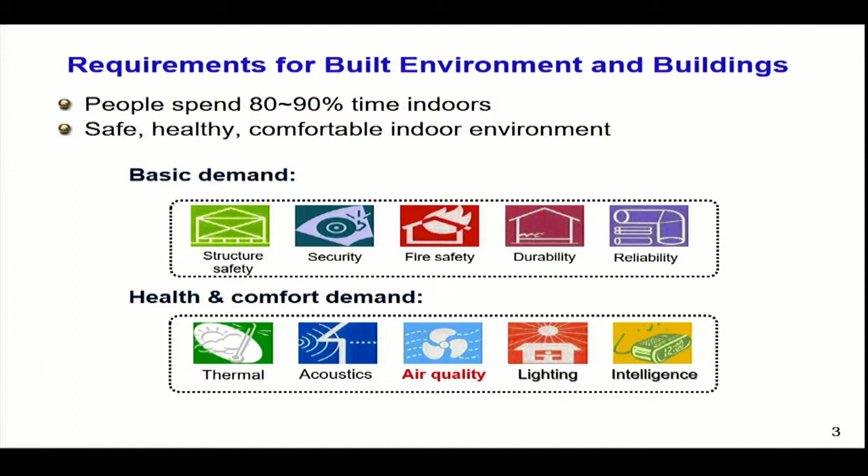So I think as a very general background, the requirement for the built environment and buildings is very clear because people spend a lot of time, 80%, 90% of time indoors. So we really need safe, healthy, and comfortable indoor environment. And as you have heard from Professor Bruson's keynote speech yesterday, indoor air quality is really a very important part of indoor environment.

To get good indoor air quality, we really have to battle with many indoor sources. For example, many indoor chemicals are emitted from indoor sources, like building materials, furniture. However, also some pollutants, like PM 2.5, could come from outside, especially, as Professor Chen mentioned, in some developing countries like China, we sometimes have the haze problem. So pollutants can come into buildings, and we are facing both outdoor and indoor air pollution. That's a big challenge.

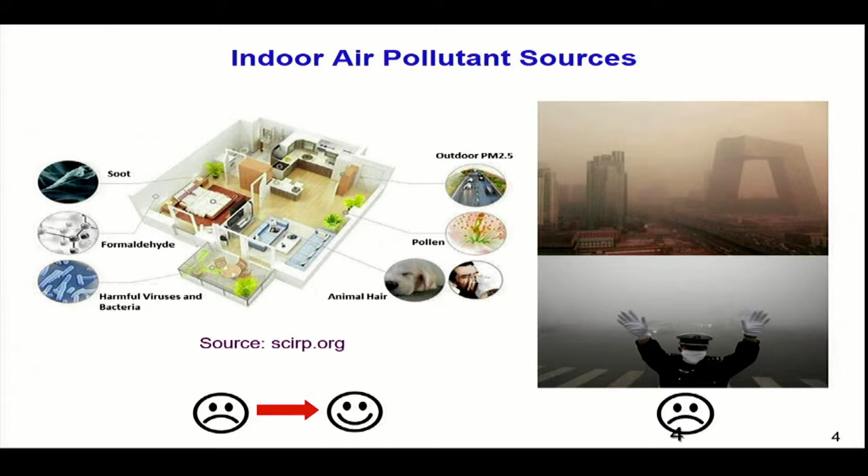So generally speaking, we need to set up a standard, and the standard could come from health studies or from authorities like WHO.

Generally, we need to make sure the pollutant concentration level meets the standard requirement, and there are different ways to get there. Source control is the most important procedure, and sometimes we also have to combine it with ventilation. If these two don't work well, then you have to consider air cleaning. So the priority is source control should always come first.

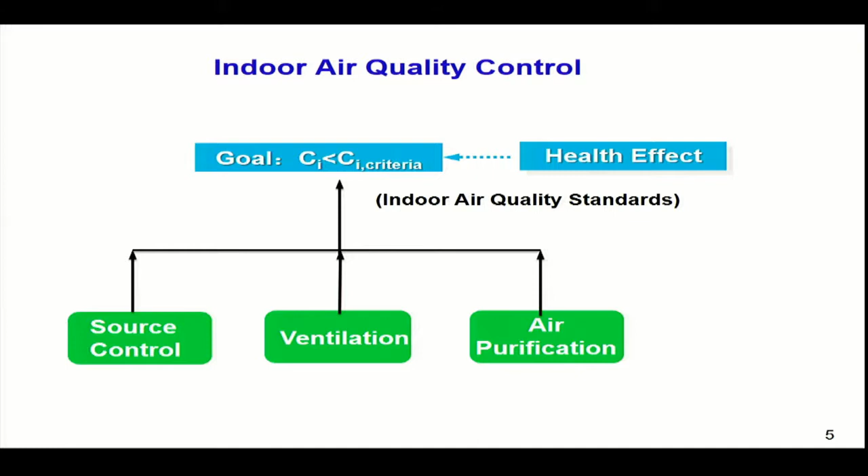So what's the reality in real buildings? Here I show a large data set collected by the China CDC. They did measurements in new homes, some occupied, some unoccupied. If occupied, it's within 1 year, so they're all considered new homes. They measured different chemicals, and the last column shows the China standard, GB18883 — you cannot exceed that level to be considered acceptable. It's not superior, but it's acceptable.

From here you can see for many pollutants — formaldehyde, benzene, toluene, TVOC — the average concentration already exceeds the standard limit. That means a huge percentage of homes don't have acceptable air quality, and the sample size is relatively large, in the thousands of homes.

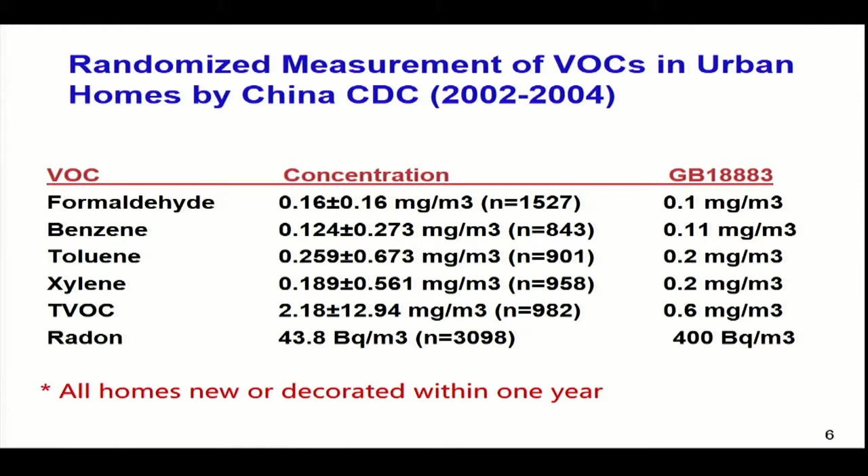Long-term field studies have also shown a clear trend between the time after decoration and the possibility of VOCs exceeding the standard limit. For example, for a 1 month home, based on a study of more than 5,000 samples, 75% may have a problem with one or several VOCs. As time goes on, the trend decays. However, even after 2 years, there's still about 30% of homes with some pollutant problems. So this really is a big issue.

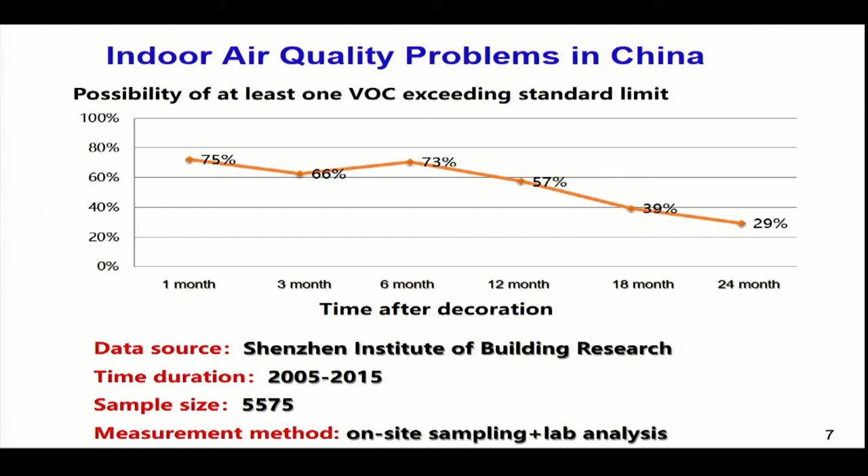Although I just showed data for China, I think this is common in many other countries, including developed countries. We've seen a lot of reports, although I don't have a very systematic collection of the data. So what could be done to prevent this at the beginning?

Of course, you can do field measurement — that can identify the problem, but it cannot solve the problem. If you want to solve the problem, you really need to look at the early design stage. When you put the material in, when you put the furniture in, you've got to do something. At best, you need to show that after you bring this material in, it's not going to cause a problem. That's what we want to do.

So foresee the potential problems, and that's not all. If you foresee the problem, you can take action ahead of time rather than later. If it already happened, then it's very difficult to do any remediation.

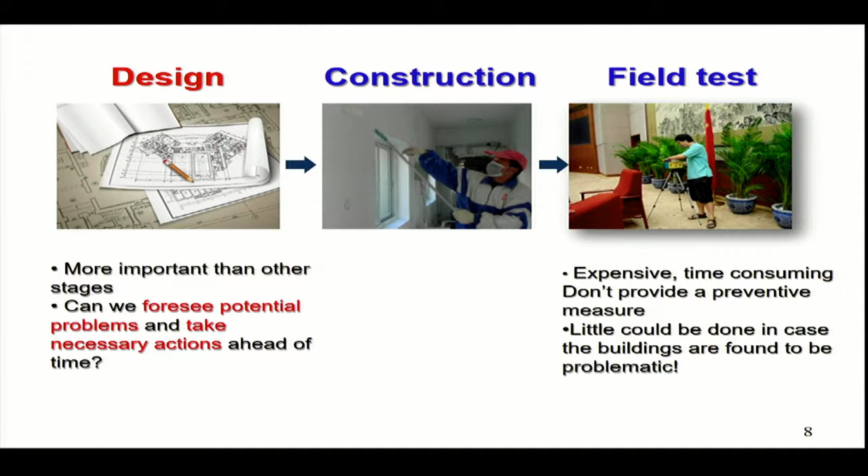That comes to what I call the simulation prevention approach. The idea is kind of simple: before you do real implementation in the early design stage, you do the simulation and try to find out what's going to happen afterwards. It could be long-term or short-term, depending on the time of concern.

You can also consider different timing issues. For example, you have different materials, but they may not be brought into the building at the same time. You can consider that issue as well.

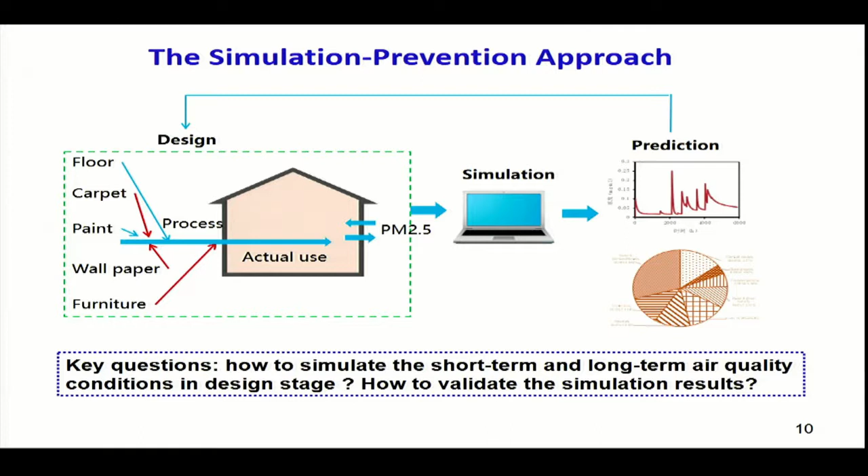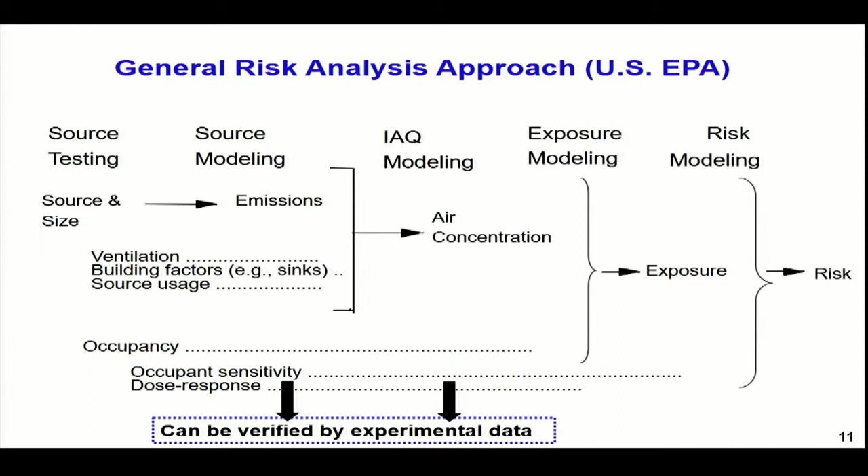With all this in mind, let's go to some general discussion about modeling and simulation. First, you need to pick a system — the system could be physical or notional. We refer to modeling as the physical, mathematical, or logical representation of the system. So you simplify the system, use an algorithm, do the simulation, and predict the future. This is basically what we are talking about.

However, I have to say modeling is not the purpose. Modeling is about trying to develop data — you want to predict something in the future so that you can take preventive action.

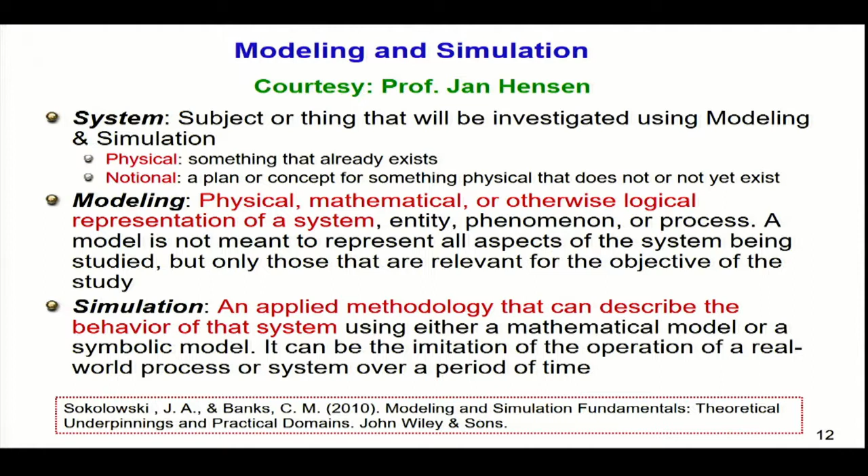Why modeling? Well, I think many different answers you can come up with. For example, we want to use models to understand a very complex world. We want to simplify the problem, and you can predict the future, and also you can make better informed decisions.

For example, when you design an air conditioning system in this room, you need to model the air conditioning load and then select the size of the equipment. Otherwise, you don't know how big the equipment should be. Similar to air quality, of course, you can also manage the risk.

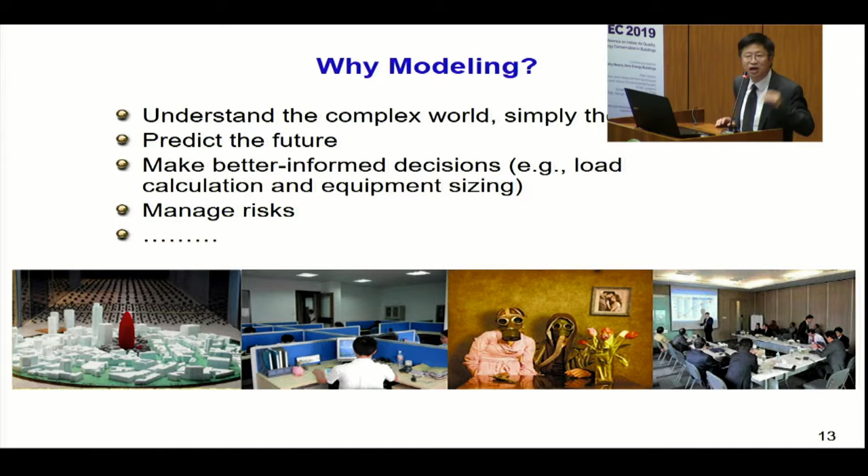I would like to say that simulation is really not a single game. It's actually part of the scientific loop that involves many things, like experimental measurements, hypotheses, observations, and also simulation algorithms. So it's a part of the scientific process.

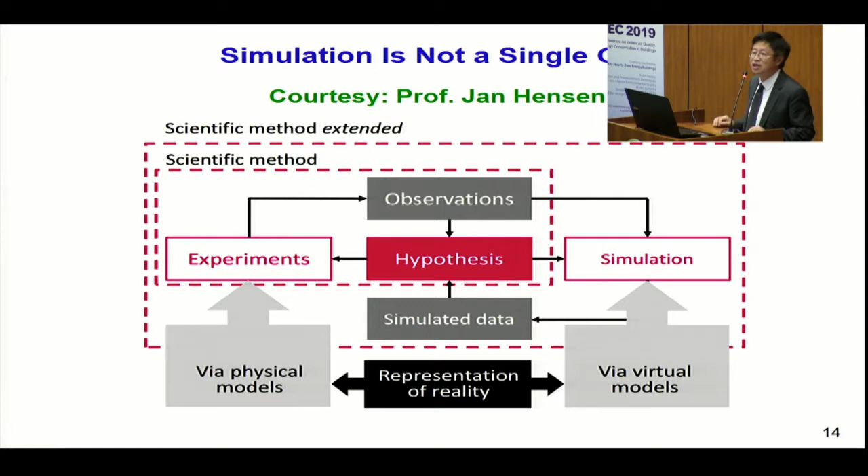Another question is why indoor air quality simulation is not so easy. For many of you familiar with building energy simulation or building thermal simulation, you probably have to agree that field is well developed compared to IAQ simulation. Of course, you can argue indoor air quality is more complicated. You are dealing with many things, not only temperature and energy. You are talking about a lot of pollutants, very complex mechanisms and phenomena.

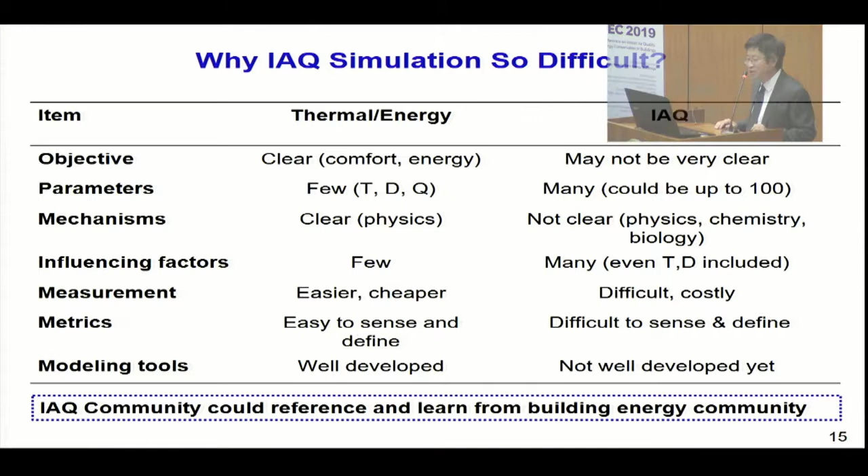That's true, but I think the IAQ community could still learn something from the energy simulation community, because that's a very well-developed field. A lot of people are working in that direction, not only in academia, but also in industry. Designers, they are very well-known, Energy Plus, that kind of software.

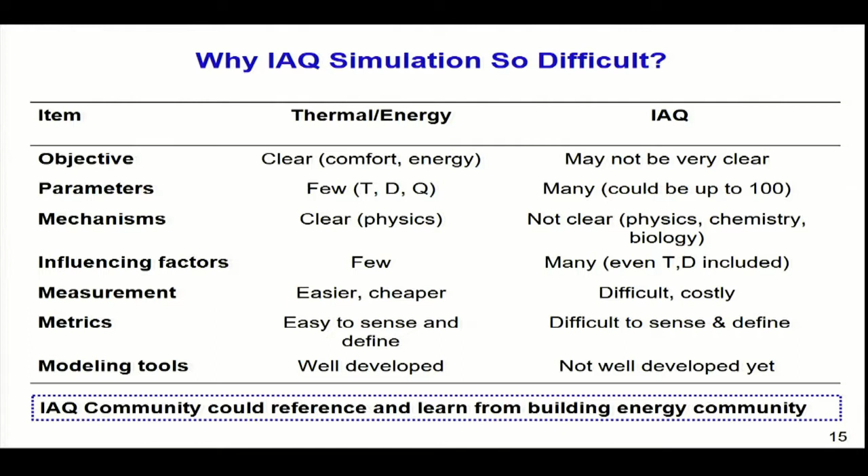I have to warn that although simulation could be very powerful, there are many times that simulation cannot do certain things. For example, it cannot substitute for intelligent thinking. I think this is obvious, right? And it cannot do the things right if you don't do the right thing.

And it cannot totally substitute for experiment. Although, if done the right way, modeling can reduce experimental time, you cannot totally replace it without doing any measurement.

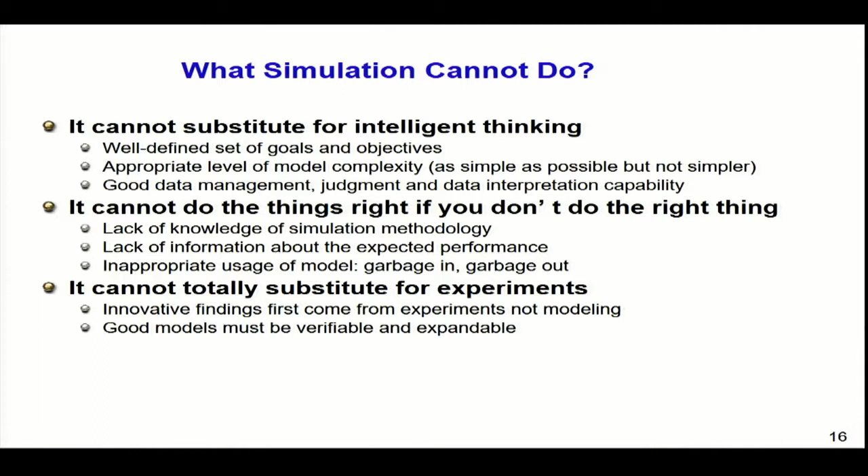So really, I think if you have a very good simulation tool, then you can really have something on hand and achieve a better goal. Although sometimes you are satisfied with the design already, how do you optimize that? If you have the tool, then you can get a better outcome.

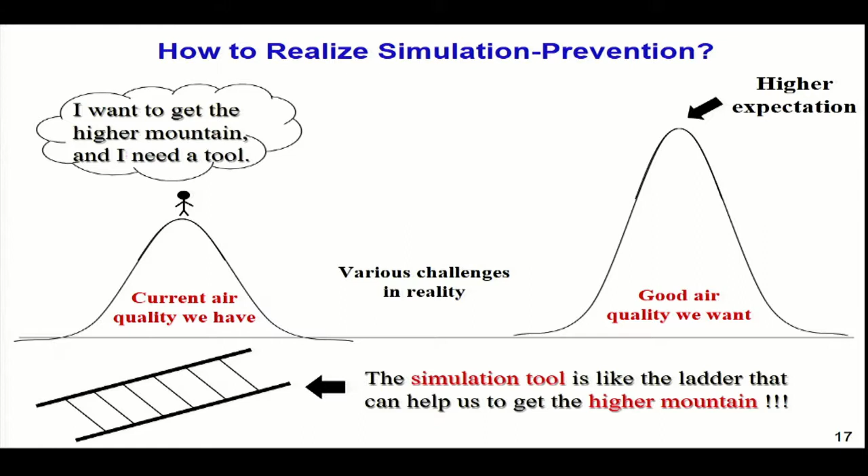And then you combine that, and then you do the simulation. You get the concentration curve, you get emission rate, and also you can get the contribution of each individual source or sink. So that's also very important, as I will talk about later on.

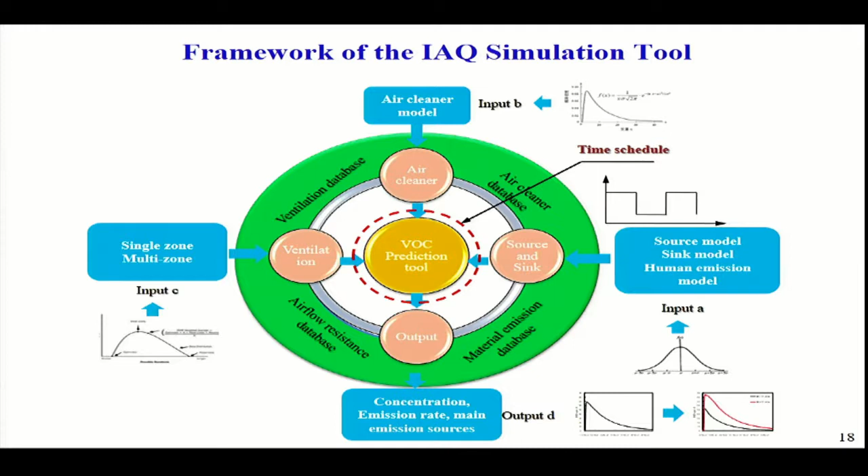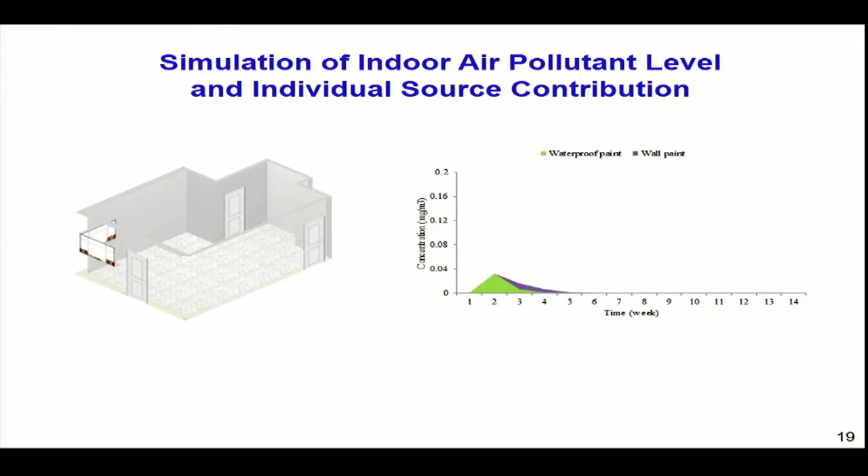For example, if you want to decorate this room, this house, you have 10 materials. Usually what you do is make sure each of these materials is good, but how good they can be, that's a big question. So if I have a tool, the first thing is I can measure each of these 10 materials, and then I get the emission pattern.

And then I put these into the house. I can simulate what's going to happen. After you do one by one, it can tell you, okay, after you add another material, how much increase of the pollutant level it will bring in.

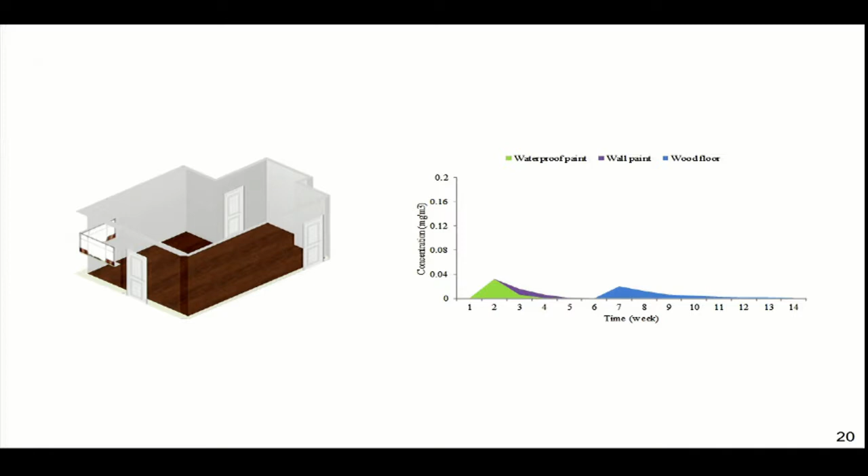And at the end, you can also find out the exact percentage of contribution from each of the 10 sources. For example, material number 5 has a big contribution, and then you can go back and see whether you can do something about that. So this is the idea. I think the main point is really you make everything digital, and you have all the numbers in mind, not just a randomized trial.

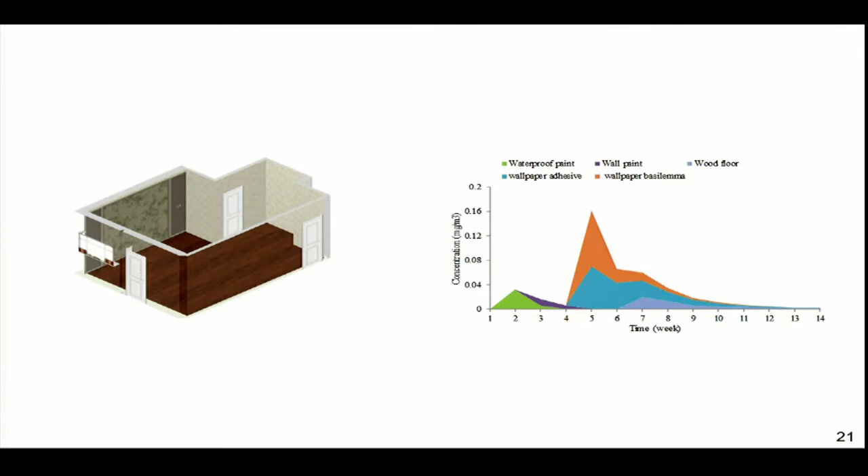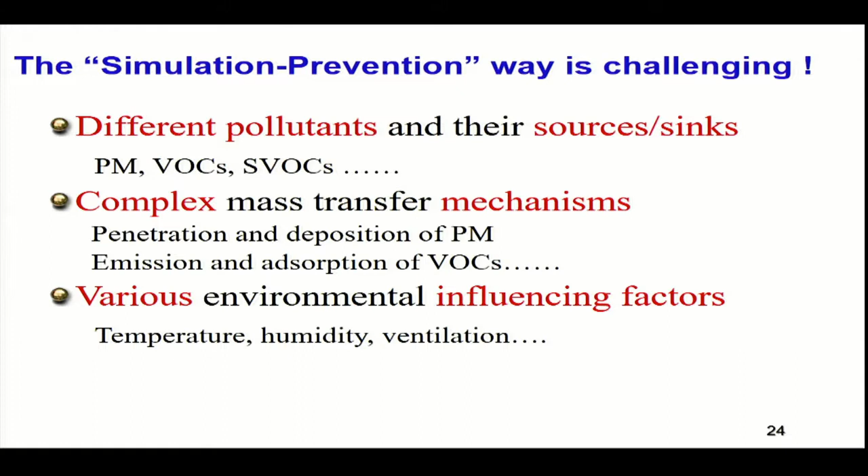Simulation prevention is not easy. It's challenging because you have to deal with different pollutant sources and sinks, complex mechanisms, and influencing factors like temperature. Everybody agrees prevention is the best way, but in reality, people always go the other way around. That's a very sad story.

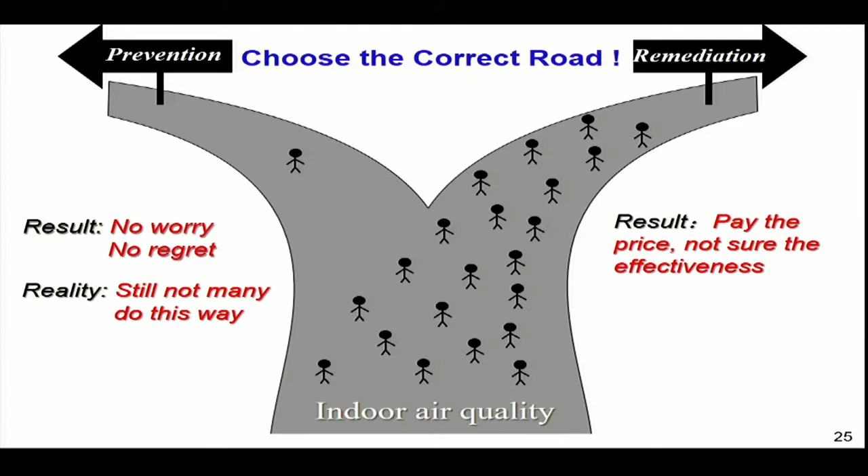Next, I'd like to spend a couple minutes talking about how to simulate indoor pollutant sources. We know, for example, VOCs - you can measure VOC in this room and get a huge number of them. These come from different sources. Some are okay, but some could be harmful to our health if higher than a certain level, so we manage to have relatively good air quality.

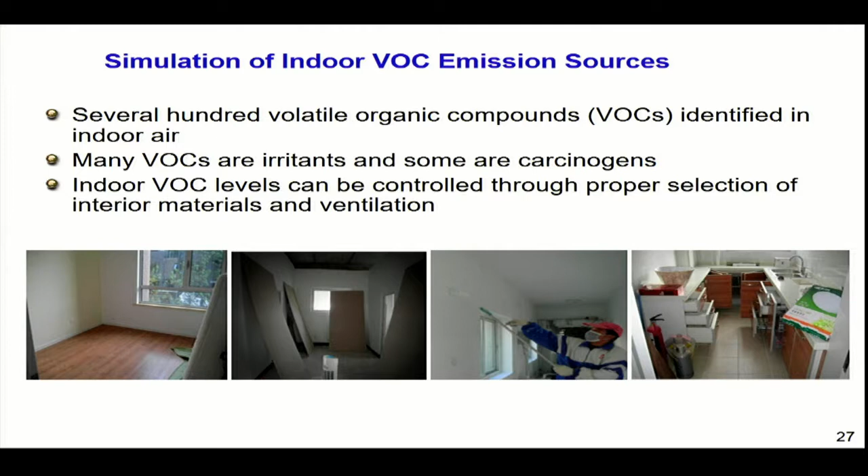So the first step is you put the material or any potential source into a chamber. A chamber could be small or large, depending on the size of the sample. Then you measure the dynamic emission curve and get data on the curve. Then you use a model to assimilate the data, and the purpose is to get key emission parameters: the diffusion coefficient, partition coefficient, and the initial emittable concentration.

As soon as you have these parameters, you can extend the emission simulation beyond the experimental time. You can do whole life cycle measurement and prediction. So this is the idea.

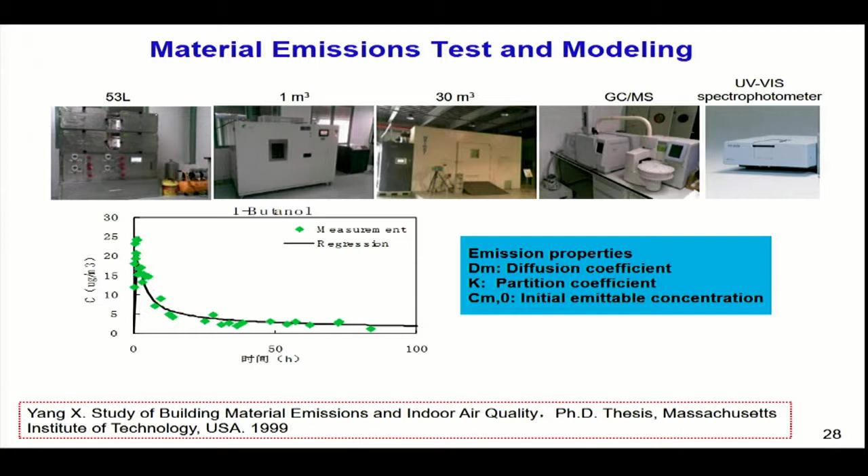Here I'd like to show you the case I studied during my PhD, more than 20 years ago. I studied the emission from wood stain, which is a wet material. I applied that material onto an oak substrate.

Because it's a wet material, it's very important to control the velocity above the surface, so I used an inner chamber to control surface velocity, and also controlled the temperature. I used a chamber to measure the emissions, GCMS to measure the concentration - that's routine - and also a very high resolution electronic balance to measure the emission rate directly. That means you get a weight loss, and then you know the emission rate without needing to calculate it.

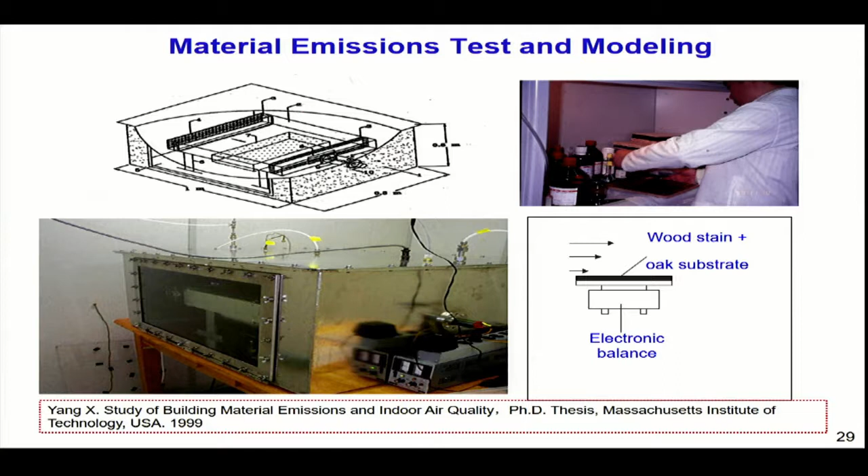After I had the data, I had to consider using a model. At the time, it was generally recognized that for wet material, people like to use the so-called vapor pressure and boundary layer model, the VB model. The key issue of this model is assuming evaporation is dominated, so you consider the convective mass transfer coefficient and the emission mass left inside the material. You use that to try to simulate the data.

However, after I did this, I found it only worked in the very early beginning - the first 2 hours, no problem. After 2 hours, no matter what I did, it doesn't match the data. After a long time of trials and errors, I realized I may have missed some of the key emission mechanisms.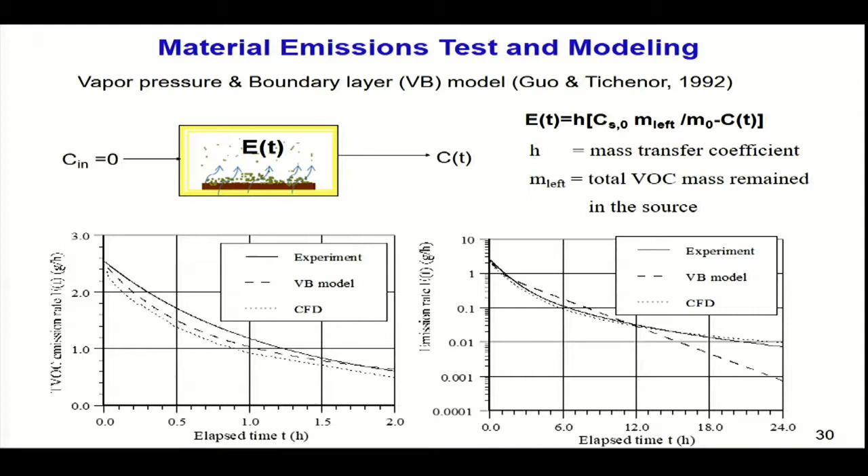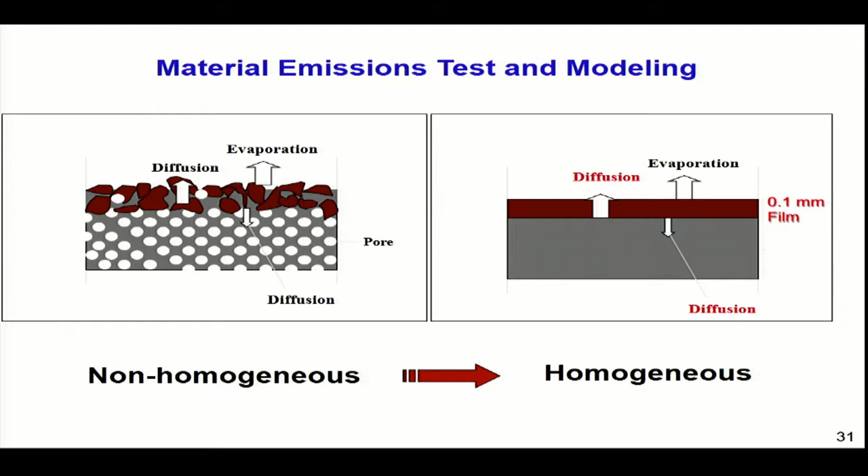Although the material is very thin, only 0.1 millimeter, like paper, you still have to consider the internal diffusion inside the film and also diffusion from the film down to the substrate. After considering this, I developed another model. Of course it looks more complicated than the previous one, but it's more mechanistic.

For example, look at the diffusion coefficient - it's not constant for the process, it actually changes during the drying process. When the concentration in the material changes, your D also changes. So this is also something difficult.

But after I did this and compared it with the data, it had a very good match. I also did the full-scale chamber measurement and verified that this model works okay. So that shows the emission process when you have to deal with physical mass transfer.

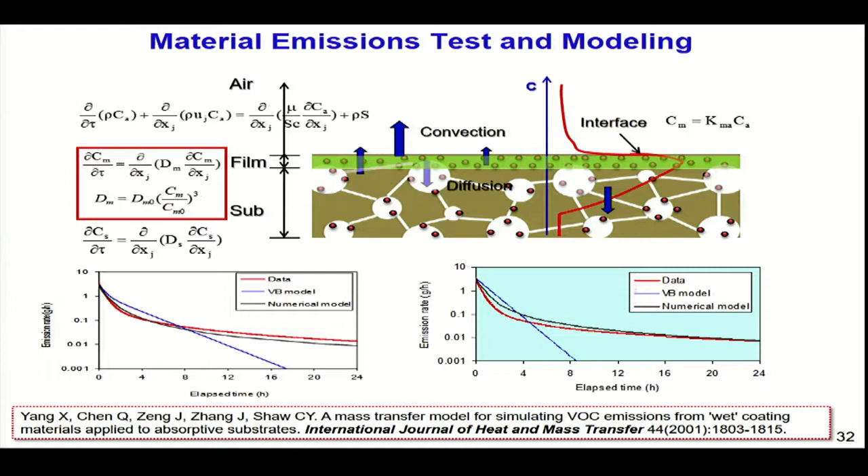How about for some other materials like adhesives, silicone sealant, which is very popular in buildings? These involve some kind of chemical reaction. During the curing process, you have a boundary, which is a curing interface - a chemical reaction occurs there and generates pollutant. That pollutant goes out through another layer, the cured material layer. So you have 3 different layers, and you develop the model for each layer, and then it can predict the emission pattern.

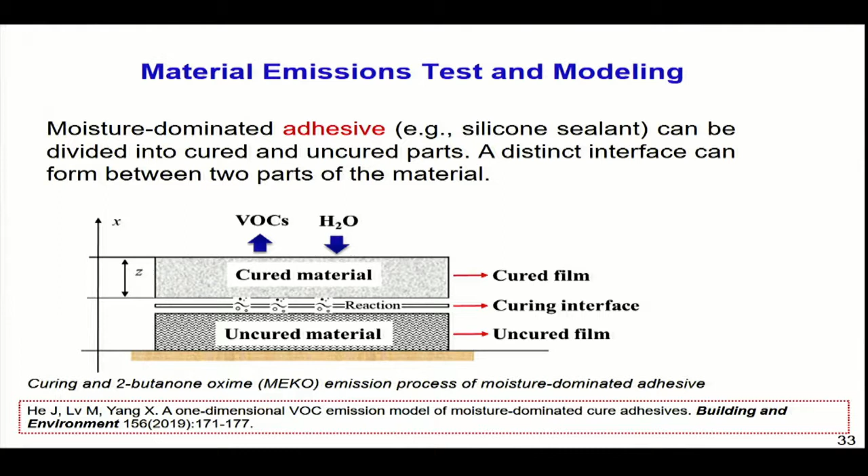So this model has the internal chemical reaction source, and it can predict different phases: the beginning first day, then the second stage for about two weeks, and then the last stage beyond that. So this could be done also, and that's about the sources.

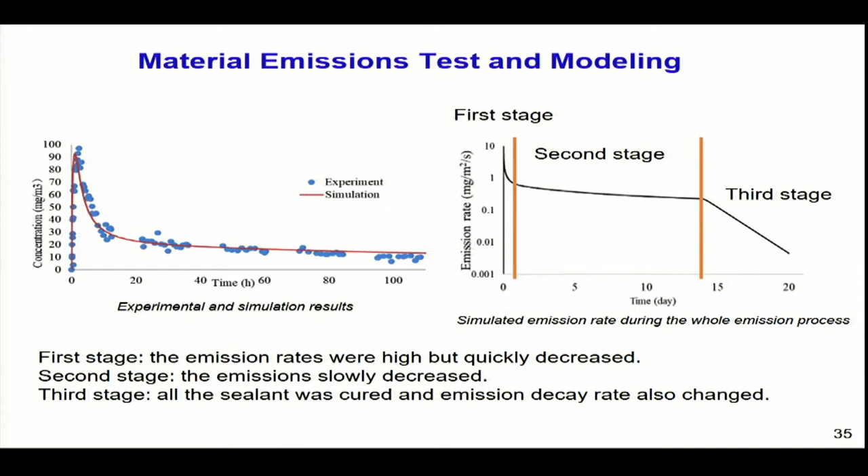Using a similar idea, we can also look at the sinks. We know some materials, like carpet, could be a source for one VOC while being a sink for other VOCs. Using the mass transfer principle, you can consider both surface adsorption and diffusion inside the material, so you can use this for long-term prediction of the sink effect.

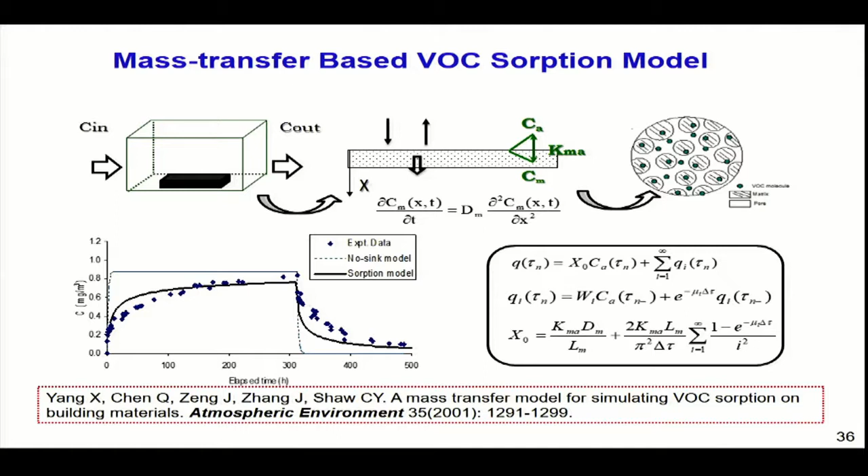Beyond all these materials, there's also one very important type of pollutant source we should not forget, and that is humans ourselves. For example, in this room we have 100, 200, 300 people sitting here. Each one of us may not generate too much pollutant, but if you add them together, that becomes a significant pollutant source. Emission measurement from people is just in the early beginning, and there hasn't been much mature method developed yet, so people are trying different ways to measure that.

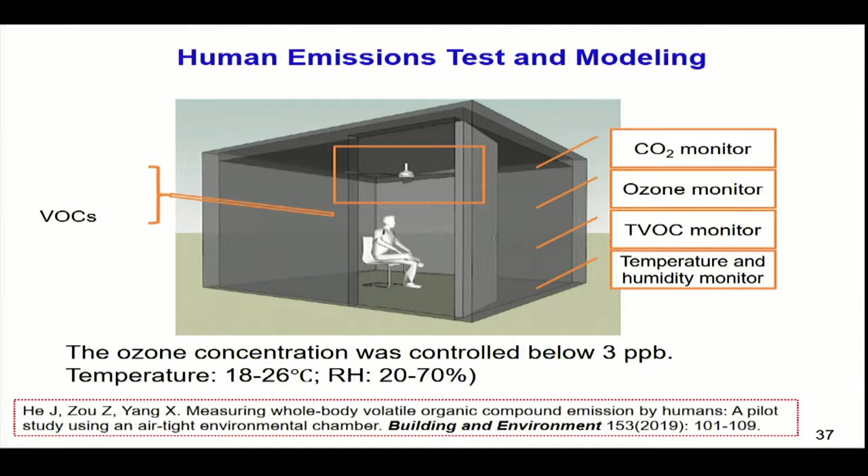What I'm showing here is just one method: use a sealed environmental chamber, put the person there for a short period of time, and then measure the emission increase curve. Using that curve, you can try to calculate the emission rate from the person. This is still ongoing, but has shown some promising results already.

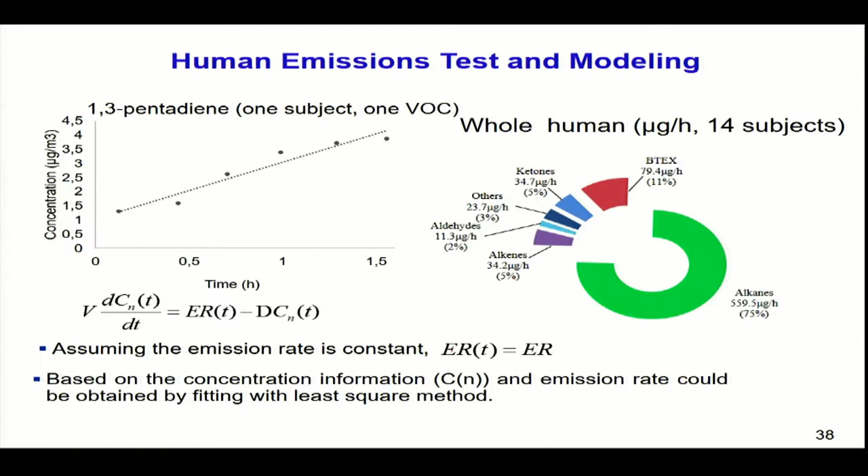Next, I'd like to use three examples to demonstrate what I have mentioned before. The first one is about the long-term validation of the indoor air quality model. And what do I mean by long-term, how long is considered?

We actually built a house, but the house is not occupied. We put one single material, a medium density fiberboard, which generates formaldehyde. So one pollutant source, one pollutant, which makes things a little bit easier.

We didn't control the temperature and humidity inside the house, just let it vary with outdoor conditions. So in summer it's hot inside, in winter it's cold inside—just naturally changing the temperature and humidity. And then we sample the air regularly, one or two weeks per sample.

The experiment started in 2012, so it's been 7 years until now—you can consider this kind of long term. Of course, you could not do this by a real chamber test, and you also could not do this by a real on-site test because no family would allow you to do this kind of monitoring.

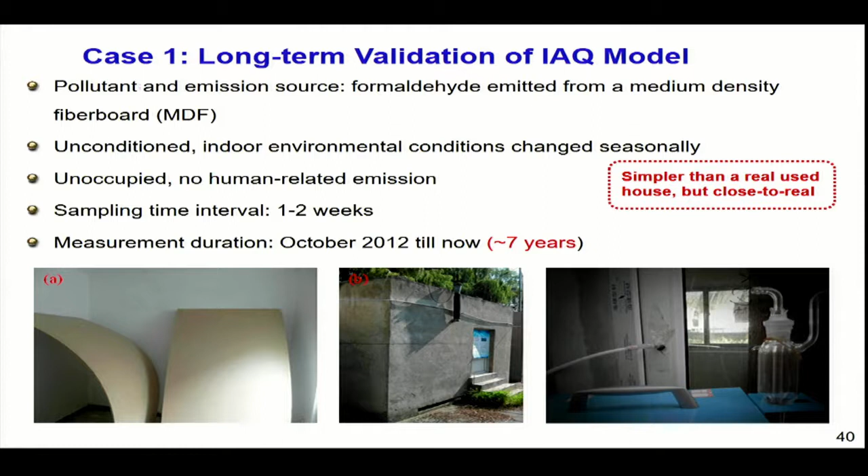So the result turned out to be quite interesting. You've seen a very strong seasonal variation of the concentration: in summer it goes to a very high level, and in winter it drops down to a very low level. And year by year, you see a decay. This is a very interesting phenomenon.

Of course, we want to see what could cause this phenomenon. The first thing we look at is how this agrees with the temperature variation. You see the concentration really varies very nicely with the temperature variation, so the first thing that comes to mind is temperature could make a huge impact on the emission process.

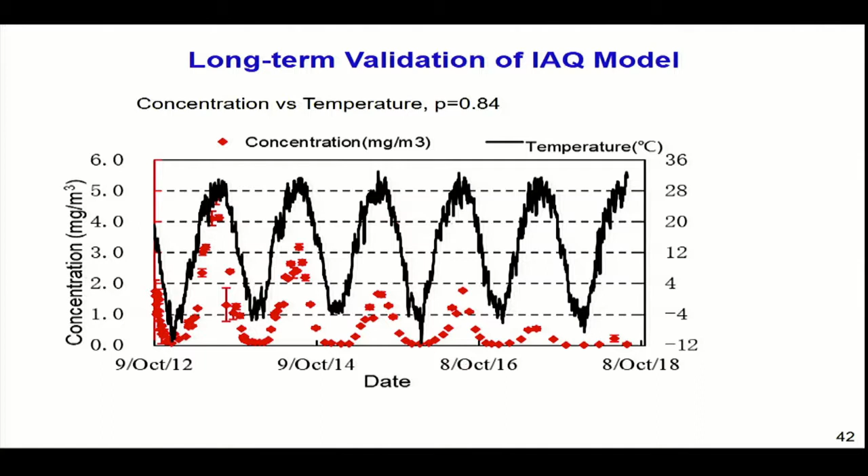We also try to look at the humidity effect. We try relative humidity, shown on the right-hand side—not matching very well. But if you look at the absolute humidity on the left side, the matching is much better. That really means absolute humidity could be a contributing factor to the emission from this fiberboard.

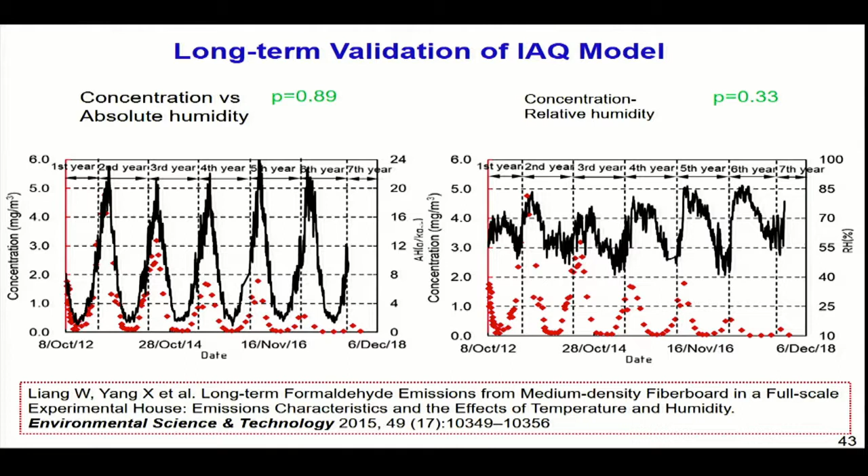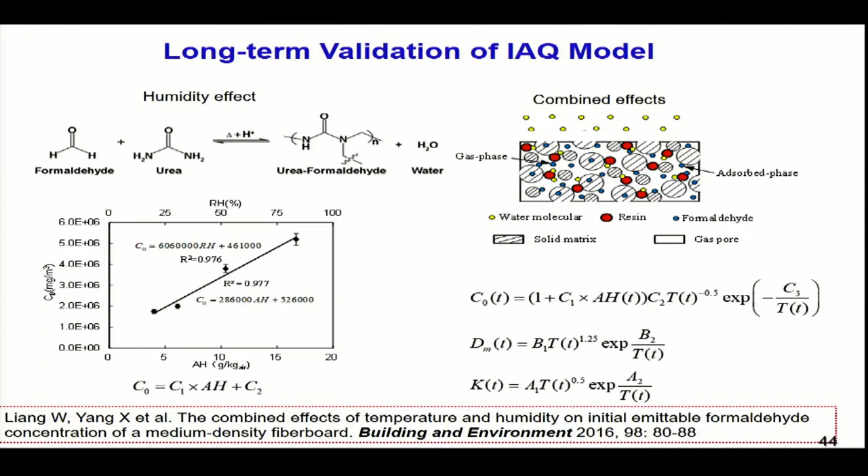So again, this really tells us, if you want to use a model, you really have to have a certain level of credibility about the accuracy of the model.

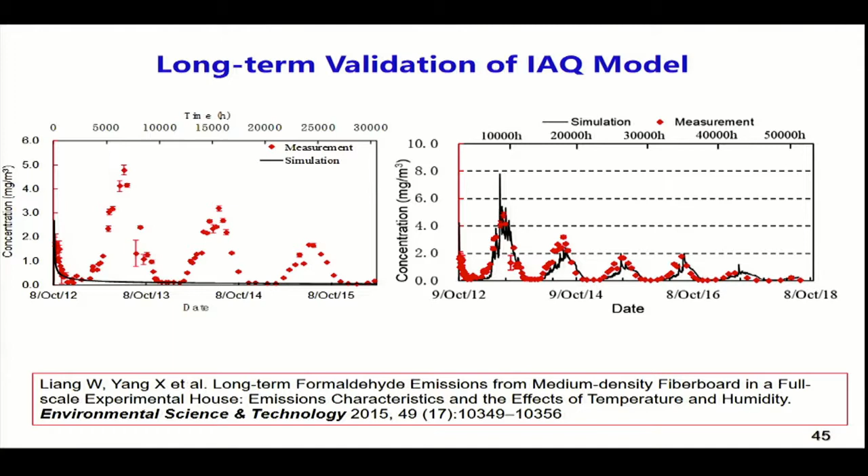So the second example I want to show you is the IAQ prediction in a real building. In China, many people live in this kind of high-rise, multi-family buildings. We were invited to give advice to one of the apartments inside the building and provide some comments on what they need to do.

So we actually tried to apply this approach. We did all the measurements of the potential sources, then did a simulation, and found that one of the artificial boards may cause problems to the air quality. So we told the owner, you better not use that.

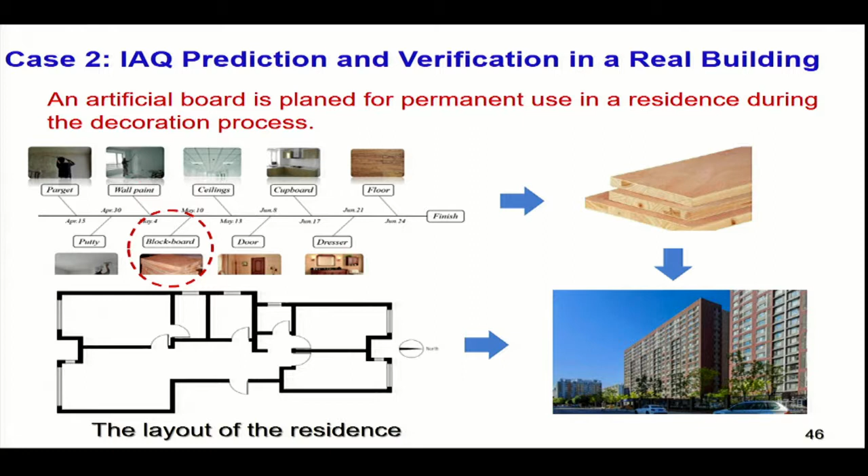Unfortunately, the owner didn't listen to us. They thought, well, and still put it in, and then we did the measurement. So on the left, after 72 hours of installing that board, we did a measurement. It was very high, 0.39 milligram per cubic meter.

Clearly that's not acceptable. We told them again, we showed them this is not going to be good. Well, the owner still hesitated because it's already installed. So they said, well, let's wait a couple of days.

So we waited a month, and then did another measurement, the concentration is still there. Didn't decay. So then the owner decided to remove that pollutant source, the board.

And then we did another measurement, after a couple of days, and you see it dropped sharply from 0.4 to 0.2, almost half.

So clearly this shows, well, first of all, it's an unfortunate story, they didn't listen at the beginning. But through this process, we actually double verified our model, two times: the first time after they put the material in, second time after they removed the material from the house. So this again adds some credibility to the model.

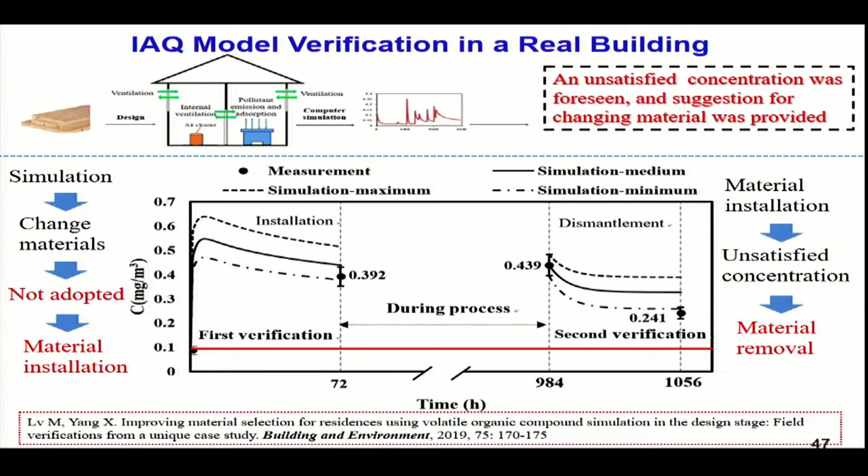The last case I want to talk about is the air quality in aircraft cabins. I think all of us know the aircraft cabin is a kind of sealed, very much sealed environment. When it's flying in the air at 10,000 meters, outside is very cold, low pressure. You cannot open the window, of course.

So they have to rely on the air that comes from the engine. Compressed air from the engine is cooled and then used for ventilation. So that means the ventilation in the aircraft cabin is very expensive. But you have to rely on that to dilute all the pollutants generated inside the cabin.

So this is how it works. Part of the ventilation air is exhausted and part of the air is recirculated. So again, the key question is how can we control the indoor pollutant source the best we can so that we could minimize the requirement for ventilation, or improve the air quality inside the cabin.

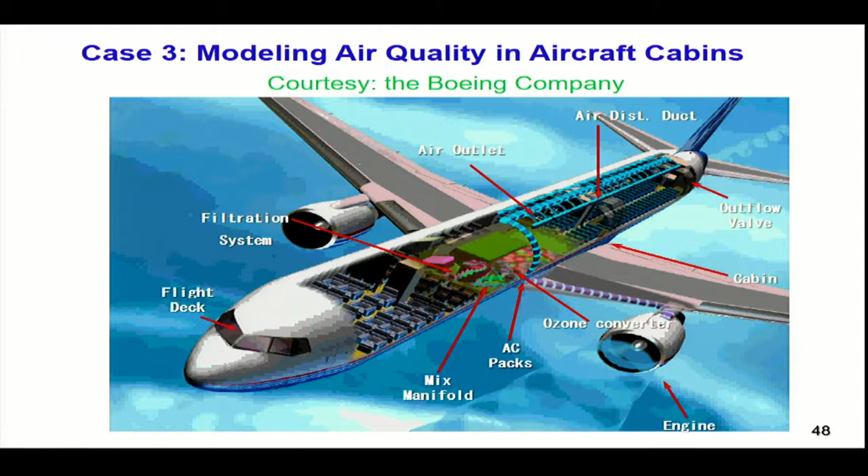So to do that, the first thing we did was onboard measurements. We came to the real aircraft cabin and measured parameters like CO2, particles, ozone, and also VOCs. I think the difference between aircraft measurement and building measurement is you cannot bring huge equipment on board because they have very strict safety requirements. All the equipment has to pass the security check, which adds a lot of difficulty to the measurement.

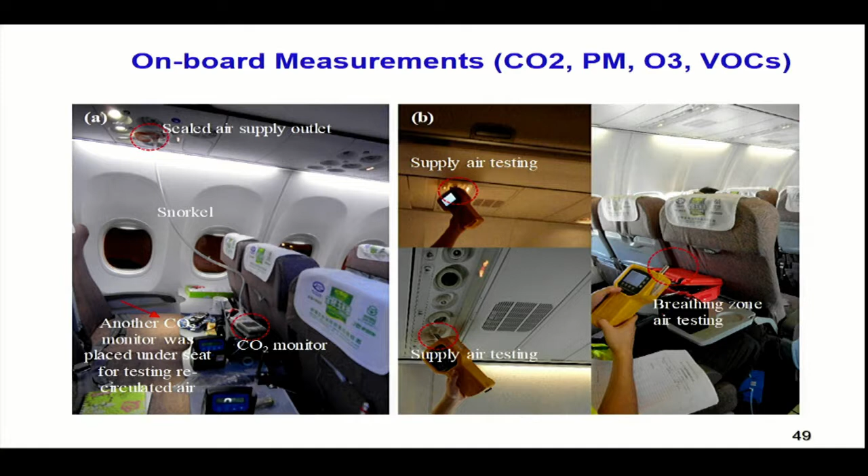Anyway, after measuring more than 100 aircraft, we came up with this so-called target VOC list. It's still a long list, about 30 pollutants, but these are the pollutants we probably need to really pay attention to. Although it's not a very large number, the concentration in the aircraft cabin is not high individually, but if you combine them together, add them up, the air quality could still be not so good.

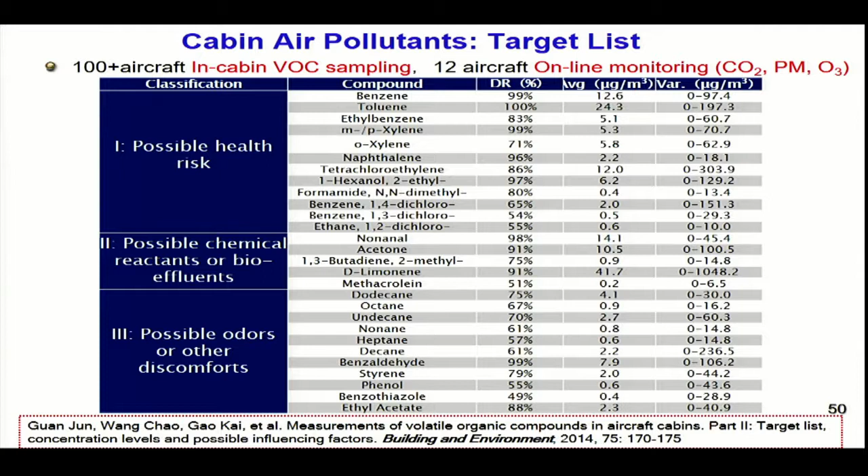So then we use the so-called forward method, where we try to figure out the pollution source inside the cabin. We categorize all these sources and sinks, and try to understand one by one. This is the first procedure. And then we get the database, collect the data, and try to see the potential contribution.

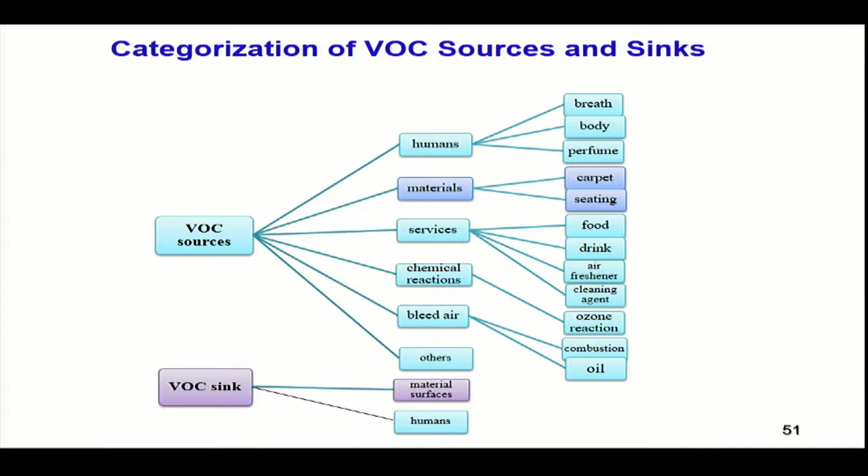And also we did another way, which is the so-called top-down method, or the inverse method. After we get the measurement data inside the cabin, we use some model trying to figure out the contribution ratio from the pollutant source.

So here I just give the final result. Clearly, humans contribute a lot to this pollutant. Human include the breath and human skin, so that's one part of the contribution. Another one, also related to human, is chemical reaction between ozone and human skin, which also contributes a good amount. But other than these two, there are also other pollutant sources, like materials, carpet, cleaning agents, and air from the engine. So all these could add to the indoor cabin concentration.

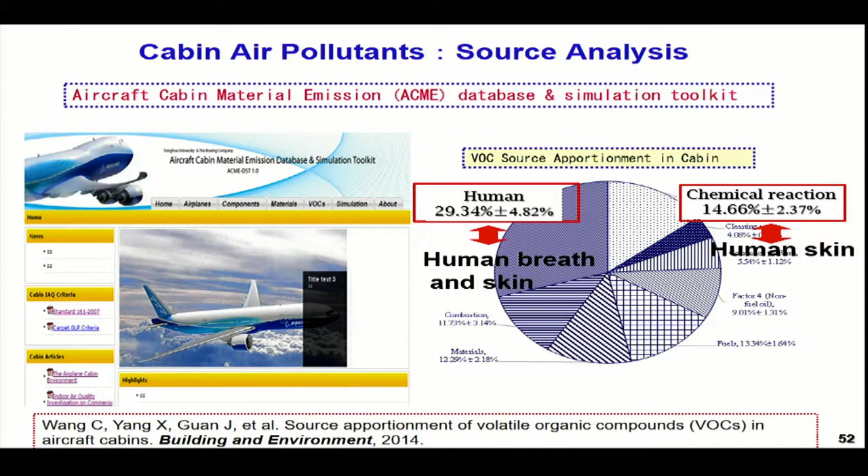Since human is a very important source in this kind of environment, we paid a lot of attention on that. We did real measurements of human breath, collected samples, and then analyzed that off the board to see how much pollutant generation comes from the breath. We also measured the whole human emission, as I mentioned before, and we used different chambers trying to look at emissions from different source materials.

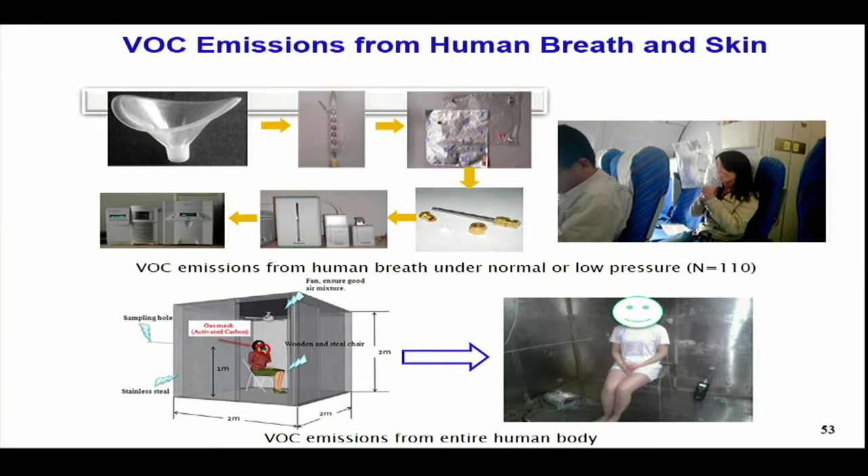These chambers range from small to large, depending on the size. For example, if you measure seat emissions, then you need to use a large chamber. One very unique feature of the aircraft cabin is it operates under low pressure condition. It's not extremely low, but it's low pressure. So we also need to understand whether low pressure can contribute to the emission rate. It turns out at a lower pressure condition, the emission gets faster.

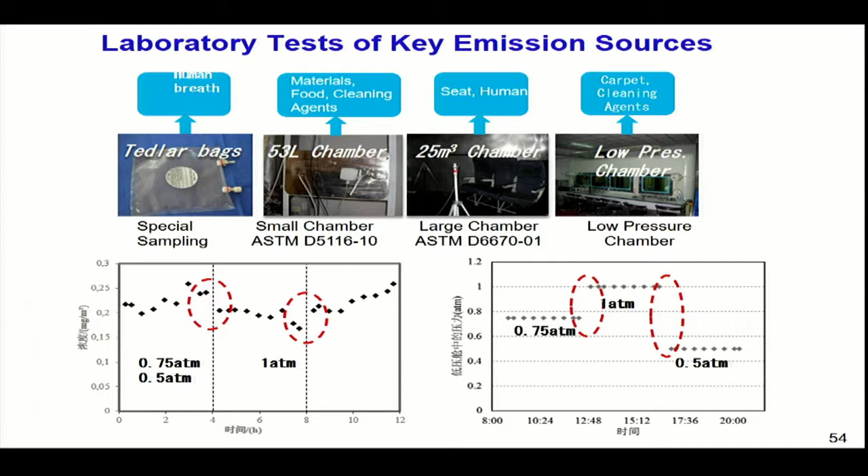This is actually a very interesting thing from this study. If you didn't consider that, you would probably mispredict the indoor concentration. After that, you can do a lot of simulation exercises, at very different scales, from macro scale in terms of meters to the very micro scale in terms of the human respiratory system. So it depends on the purpose: if you look at pollutant transport inside the cabin, macro scale is enough, but if you look at the health effect, you look at the micro scale.

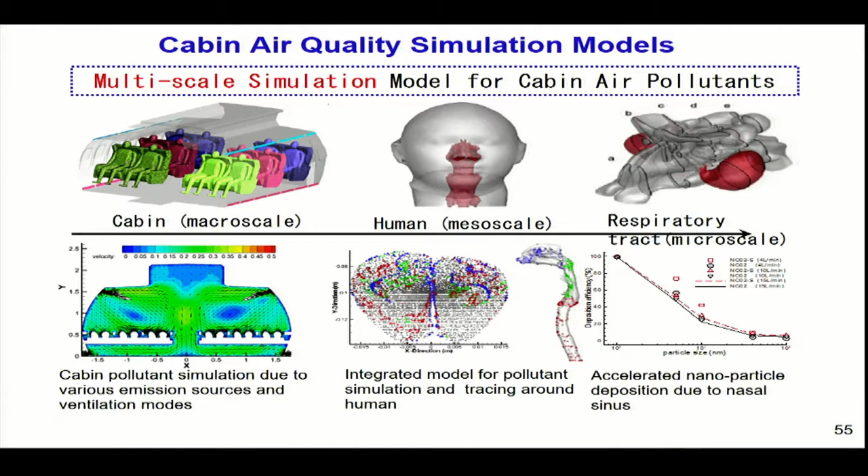This can also bring into the broader study, the so-called human-environment interaction of air pollutants. Humans can generate different kinds of pollutants to the environment, but on the other hand, humans can also uptake pollutant from the environment. So it's the so-called source and sink effect. If the human is a source, that means you are polluting the air, which is not too bad. On the other hand, if you are a sink, that means you are taking pollutant from the environment, which can damage our health. So we really have to distinguish these two things. But to do this kind of study is not easy, because a human is alive, not like a material.

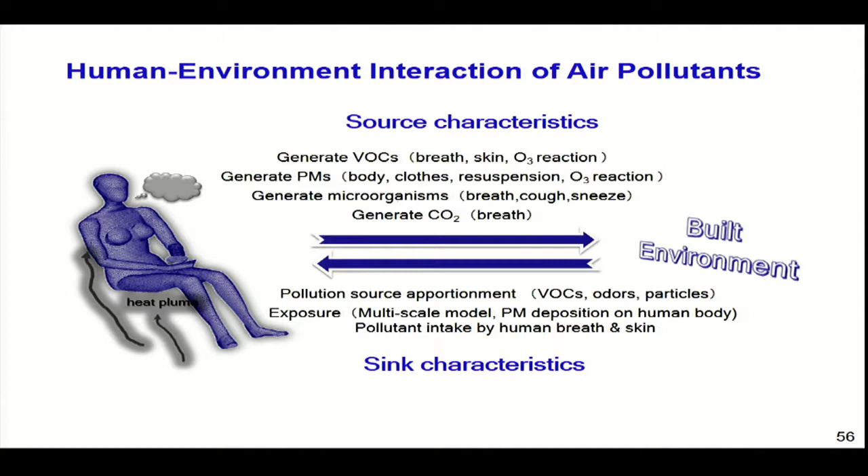So just to summarize what I've talked about: as I said at the very beginning, simulation tools can be powerful to prevent indoor air quality problems, but there should be conditions. It should be able to predict and assist in design, and the model should be verifiable. You should focus on problem solving rather than being tool-led, and the tool has to be used in good hands.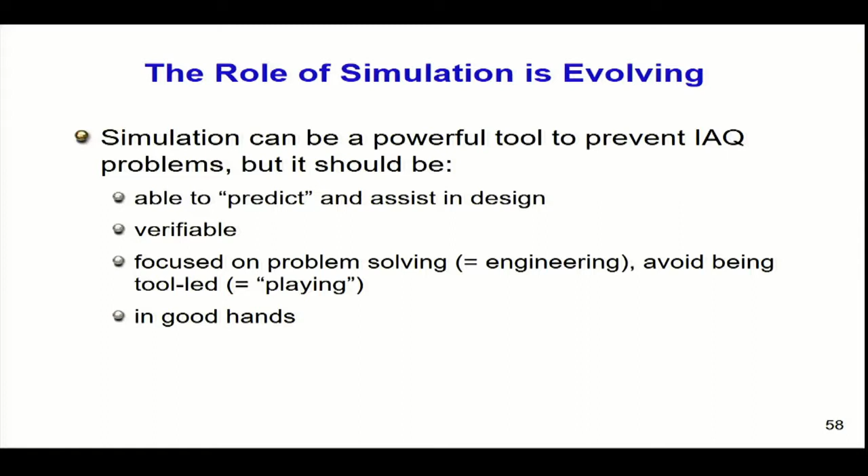Also, I think in this field there has been a kind of disengagement between academia, industry, and the people, at least in China, in my country. Because we are facing severe air quality problems, inside and outside, there's a strong need from industry and from the people, but the research is kind of slow, and tool development is kind of slow, as always, because research has to be rigorous. So how do we combine these together? Research questions should come from engineering problems, and then should be able to guide engineering design or practice, and above all, it should be able to rise higher than engineering alone.

So this is a philosophy I want to share. I really like this kind of words: research has to be related to something that is practical and should be able to solve the problem.

Before I conclude, I'd like to show you the journal, Building Simulation Journal. Many of you already know it. It's a relatively new journal, established in 2008, 11 years ago.

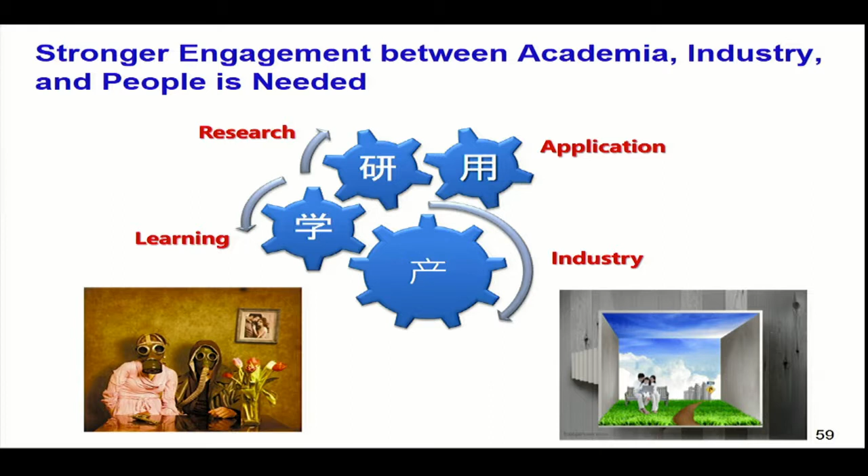I'd like to acknowledge Professor Yan Chen, who gave the keynote speech on the first day of the conference. He actually brought me into this field 23 years ago. I did my PhD study under his supervision, and after that I have been working on this field all through. I also like to thank my former and current students who made a significant contribution to this work, and also the financial support from many agencies—here only 2, but actually we are funded by many other agencies. So that concludes my presentation, and thank you very much for your attention. Thanks.

Thank you very much for this interesting and stimulating presentation, particularly focusing on the importance of simulation and the way we use simulation, because this is a problem we have in several fields. Simulation tools are quite affordable, particularly in professional practice. It can be free, actually.